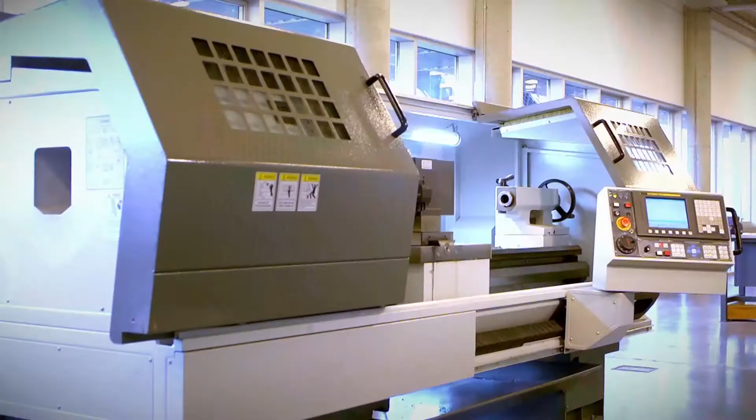First of all, what I want us to look at is the configuration of this particular lathe. The turret rotation axis is parallel to the spindle rotation axis. There are some lathes in which the turret rotation axis is perpendicular to the spindle rotation axis. Wait, Jorge, does this have any consequences on the procedure? Because I'm pretty sure that in my company, I have a turret with a perpendicular axis. Conceptually, it is the same. There are some small differences, but conceptually, it is the same.

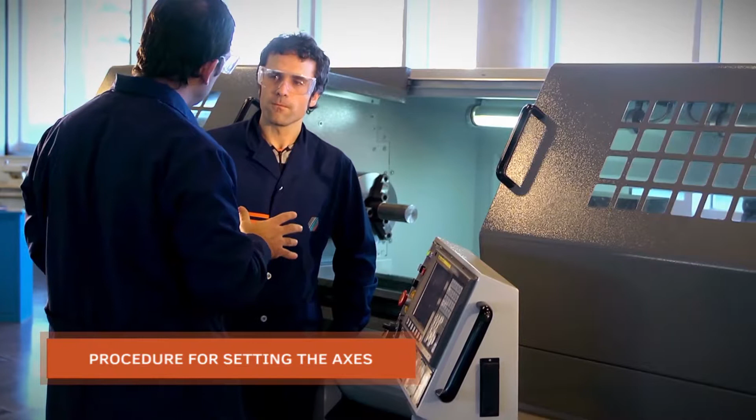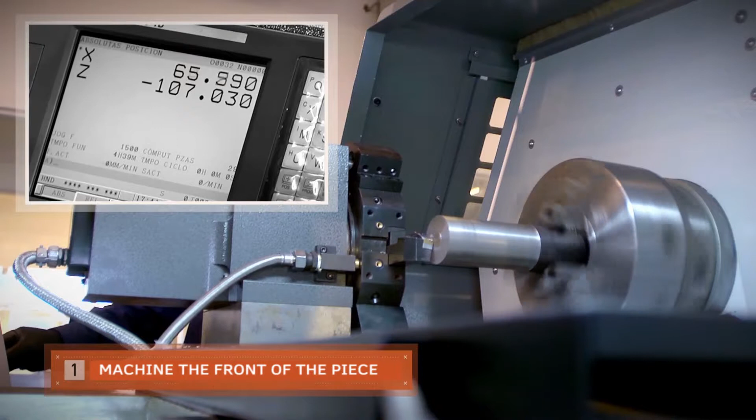To set the axis, we are going to use a piece that will act as a reference. Once we have our piece mounted on the machine, we're ready to start with the setting, in this case, of the z-axis. Okay. First of all, what we're going to do is machine the front of the piece. Then, for the second step, we're going to move away from the piece without moving the z-axis. In this way, we're going to ensure that the axis that we want to set does not change its position.

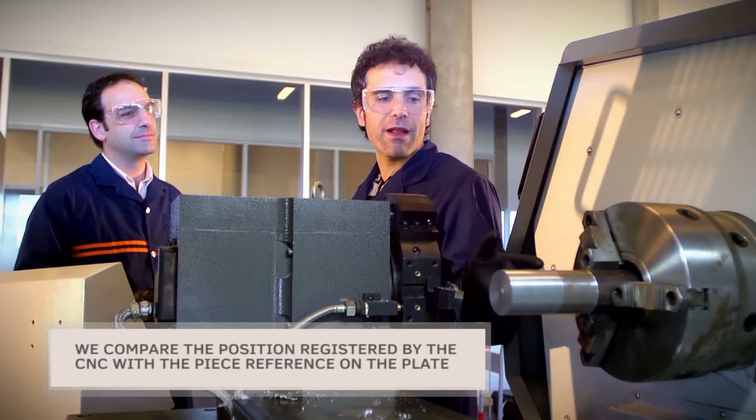I think I understand where we're going, Jorge. By keeping it on the z-axis, what we want to do is see if the z value on the screen of the machine is the same as the length of the piece measured from the front of the plate. Exactly. And this is where we come to the third step of our procedure, which consists of measuring the length from the front of the plate to the front of the piece with the greatest possible accuracy.

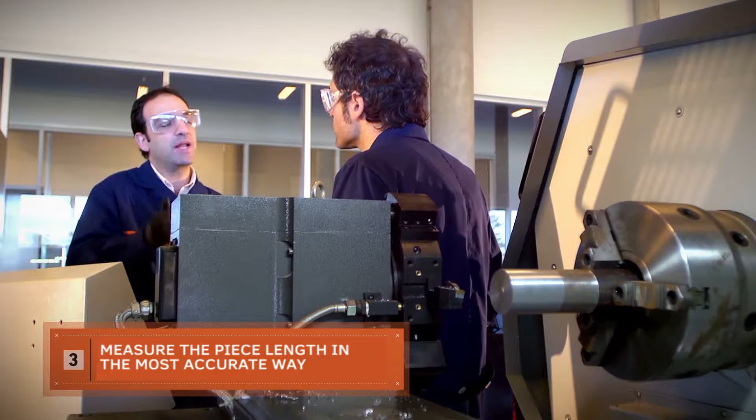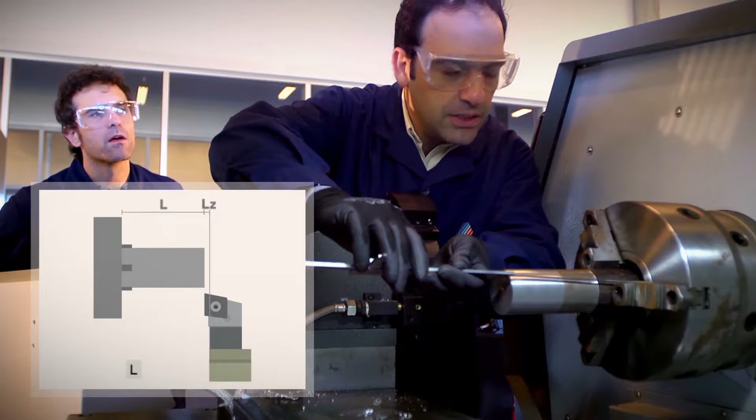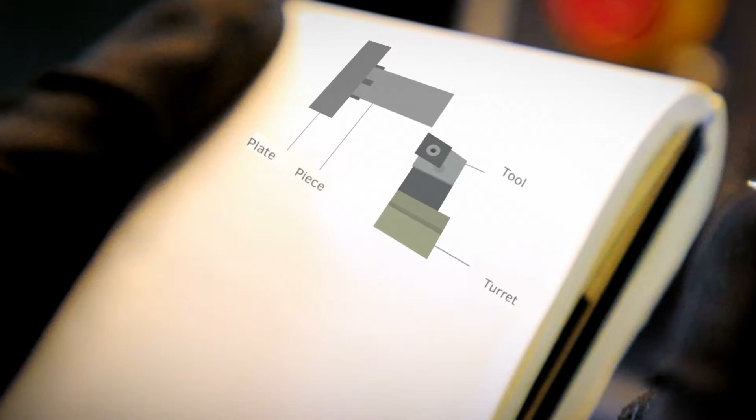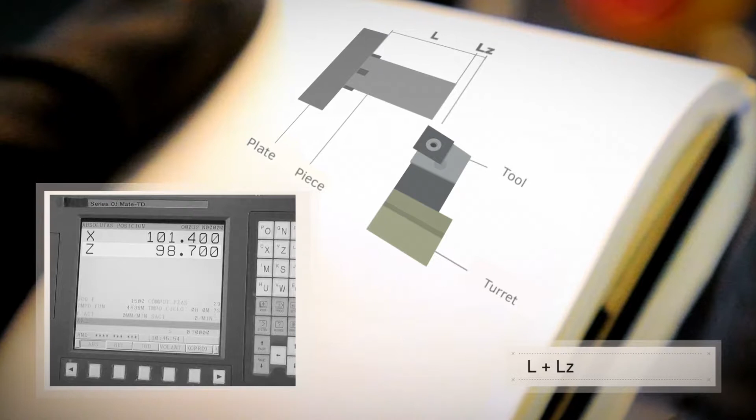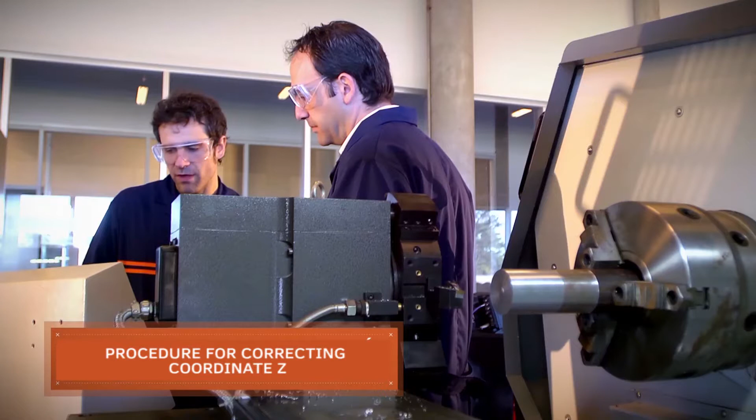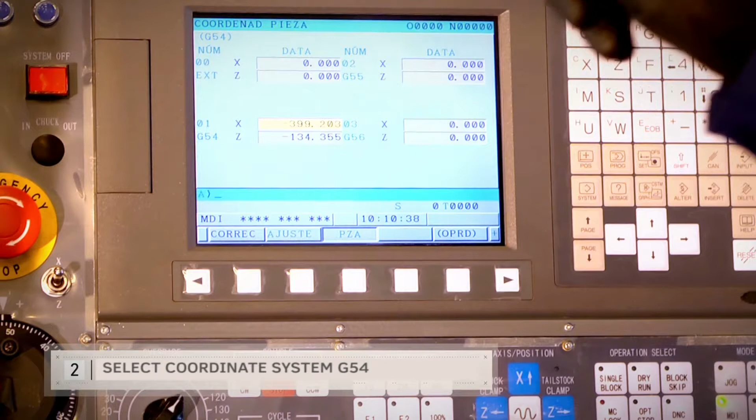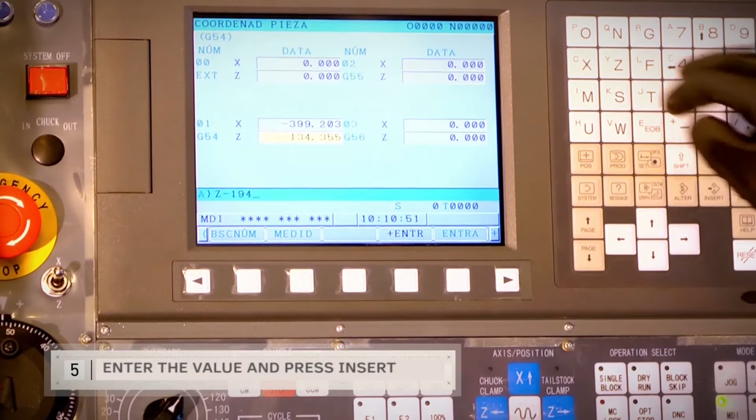I think that there's a problem, Jorge. Because with this calculation, it's still wrong. We have to correct it, don't we? That's right. Press the offset button, select the G54 coordinate system, go to the Z coordinate, press the right arrow, enter the value, the result of the sum we did before, and finally, press the insert key.

What did this do? It moved my coordinate system to the front of the plate. Therefore, now the position is 194.01. Super clear, Jorge. What I do is use the piece whose dimensions I know so as to reference perfectly and exactly the location of the turret. Don't we have to do the same with the x-axis now?

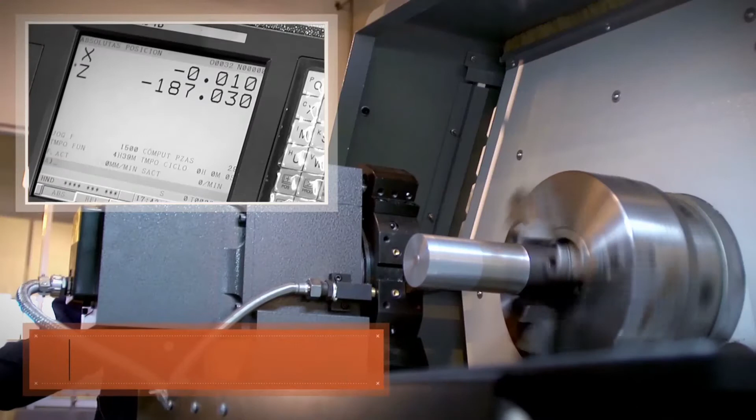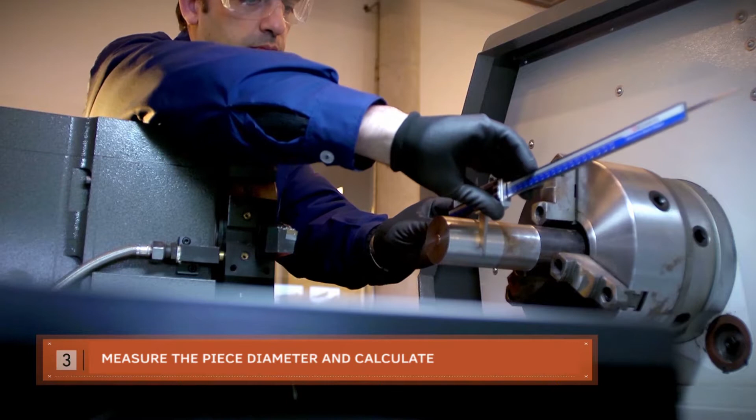What we have to do is a very similar procedure. In this case, what we're going to do is polish the surface of the piece to remove any imperfection that it has. We're going to move away from the piece without moving the x-axis. Once we're outside, we're going to measure the diameter of the piece. We'll do the calculation and we'll compare it with the on-screen values that the CNC gives us, and correct if necessary.

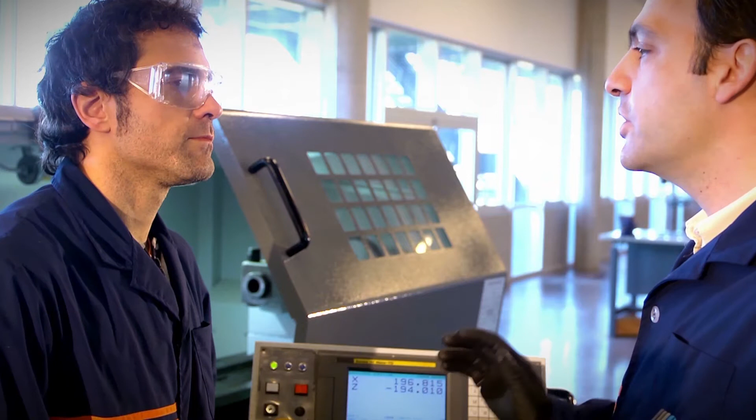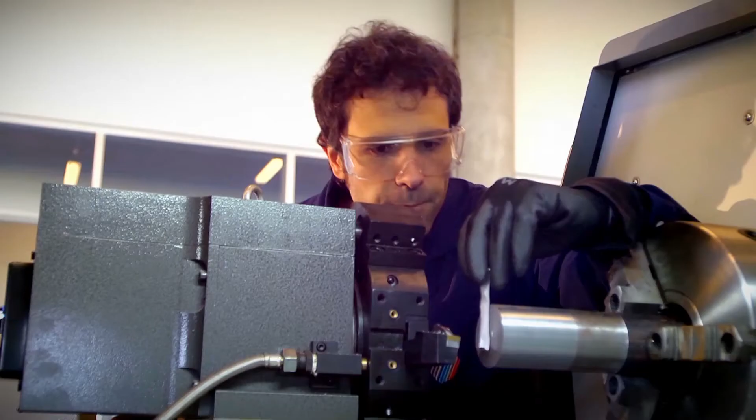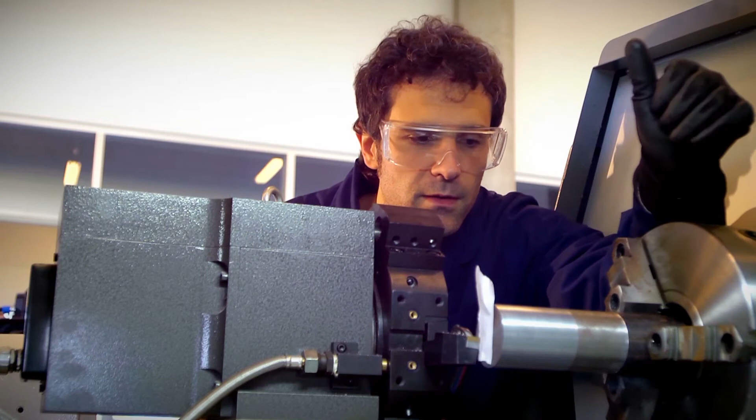Once we've set the z-axis and the x-axis coordinates, we only have to check that the coordinates match what we programmed. Where did we put the reference system? On the plate. So what should happen is that if I move the tool and touch the front of the piece, the value on the screen should be exactly the same value that we calculated. Shall I check? Let's go. There it is. Excellent. And is the value correct? Yes, perfect. Then we can say that we set the axes well.

So, Jorge, we saw how to set both the x-axis and the z-axis. Essentially, what I have to do is machine, measure, calculate, compare, and if it's necessary, correct. Is that right? Perfect. And with that, we have finished this section.